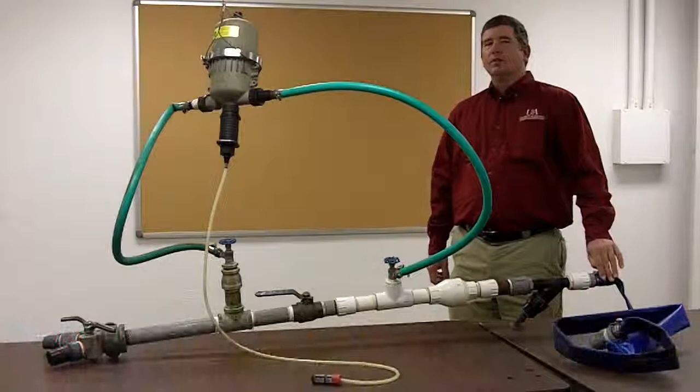Today we're going to talk a little bit more about irrigation and some parts that we typically use in drip irrigation here at the university and on small farms in the area. What I would like to show you today is we have a different type of fertigation loop that helps support a drip irrigation system on a local farm.

It's a little bit different, same principles involved in what we showed you earlier in our high tunnel strawberry plantings. But this one is a little bit different, and the main thing is that this system has a lot more flow capacity than what we have in the high tunnels. First thing I'd like to show you is this hose here is hooked up to your water source.

This system is pretty much designed on a 1.5 inch. The water flow that goes through this system is no more than 25 gallons per minute, which is considerably more than what we are using down in our high tunnels, where our maximum flow that we can have there based on our system is probably a little over 5 gallons a minute.

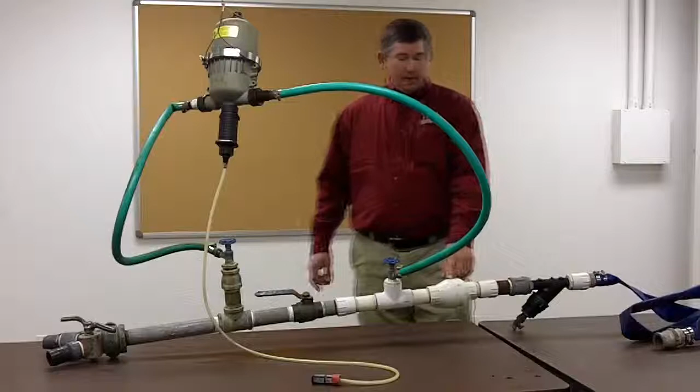The next part of this system is a filter. Then we have a backflow valve that keeps water from backflowing into the system. Then we start our fertigator loop here. As you can see, we have a valve here and the hose that goes to our fertigator unit. Then the output hose on the field side.

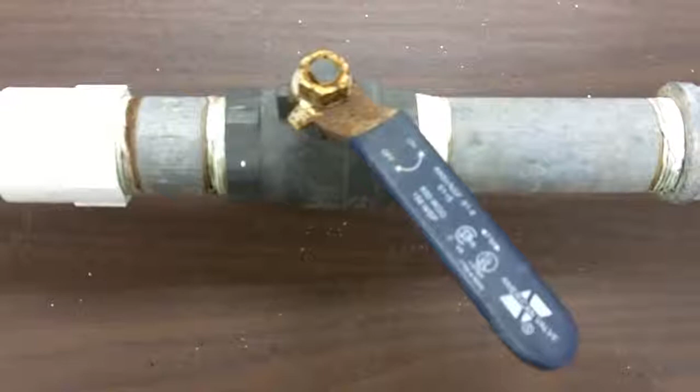Again, like we had shown you in the high tunnel, we have a bypass constriction valve on the main line to restrict flow, create back pressure to operate the fertigator. Then on our output side, here's a 2-valve manifold, so you can control where the water goes once it goes through the system.

As we had mentioned before, filtration is extremely important for drip irrigation systems, and the filter on this particular unit is different from the one in the high tunnel we showed you earlier. Though the cartridge looks the same, this filter here is actually a self-cleaning filter, and it has continuous flow going out of the filter all the time.

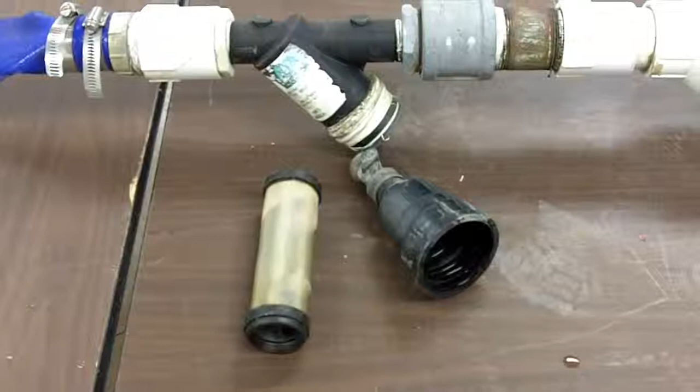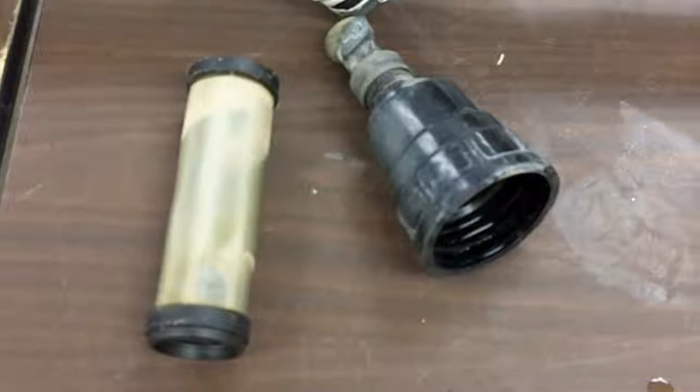Now this is set up on a well that has quite a bit of sand and some dirt in it, and the self-cleaning filter allows you to run your irrigation continuously and not have to stop and clean your filter out that often. Because remember, this unit here can run at 25 gallons a minute for days, weeks on end. However, what I've noticed about this particular one, usually once a day the filter does need to be taken out and cleaned, and then put in, then it's good to go for probably another day.

The disadvantage to this type of filter is that you'll probably lose a gallon, maybe 2 gallons per minute of water, depending on the amount of trash that's coming through and hitting your filter. If you have more trash coming through, you're going to have to increase the flow with this little valve on this particular filter.

Again, on any drip irrigation system, or any irrigation system in which you're using a fertilizer injector, there's some kind of chemical, whether it be fertilizer or pesticides, going through the irrigation water by some means. You have to have a backflow preventer valve. In this case, the well has a backflow preventer on it, but this loop right here outside the well has a backflow preventer.

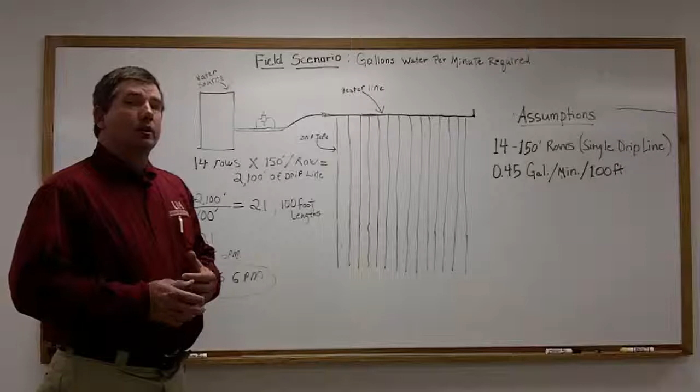We spoke earlier about one of the most important things with setting up a drip irrigation system or any irrigation system is to know how much water you're going to use in your field or fields, and to know how much water your source can provide. We've drawn up a little schematic and done some calculations here to help show you how to calculate the amount of water utilization per minute that a given field might use with drip irrigation.

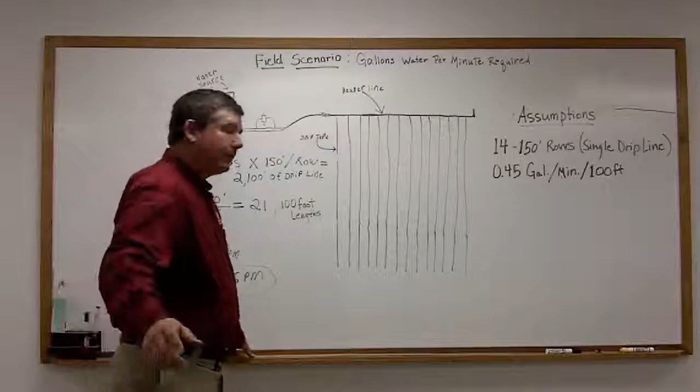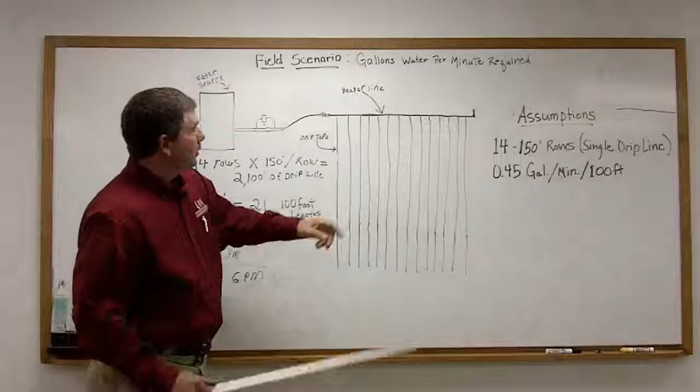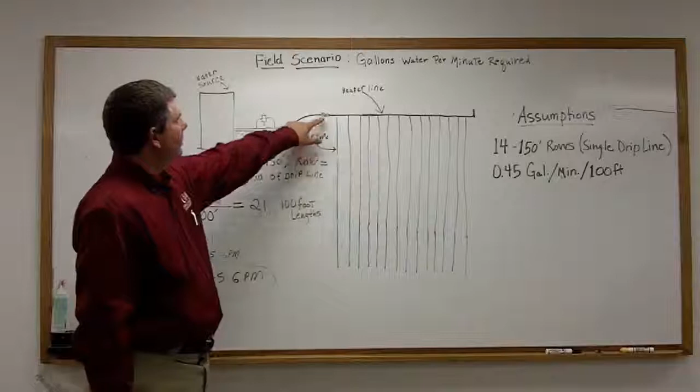First off, I'd like to show you that this is our field and our rows, and this represents drip lines. We've got 14 drip lines. This line here, however, is our header line that we talked about that our dripper lines are connected to. This is our water source, our fertigation loop, and I know you can't see it very well, but we've got a little valve and a pressure regulator right here.

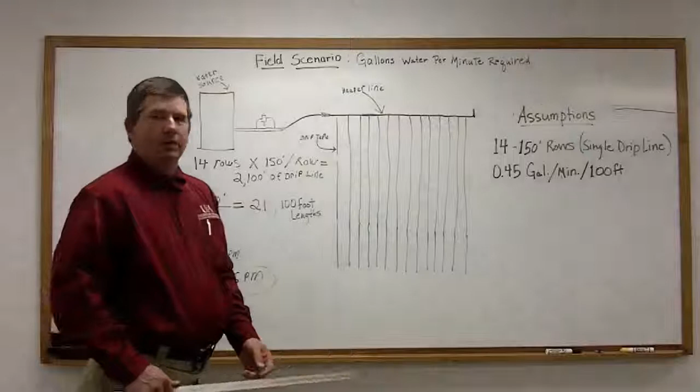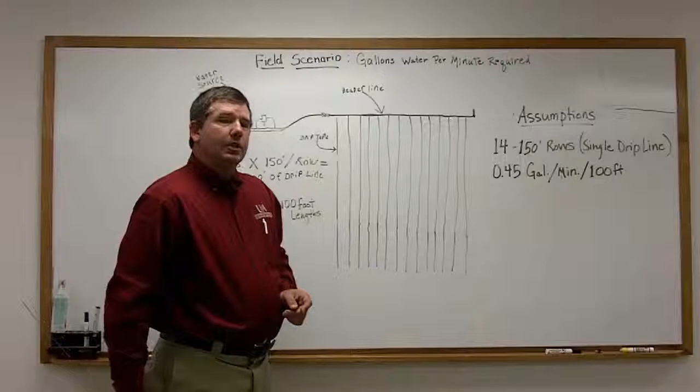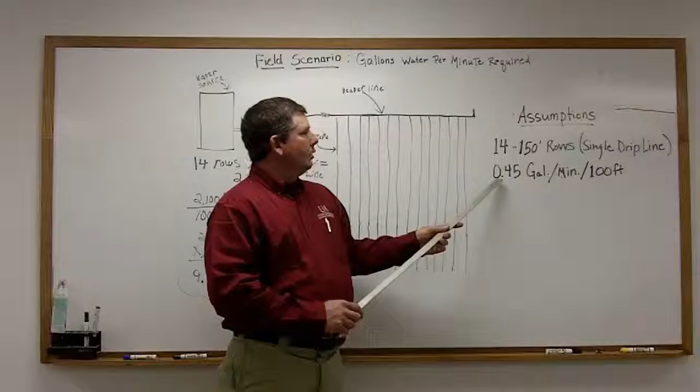Okay, we're going to make some assumptions about this small field. We're going to assume that we're growing strawberries and that they're double rowed, and that we're using a single drip line between each row. As mentioned, we have 14 rows, and our row length is 150 feet. The specifications on the drip irrigation line that we bought and installed say that for every 100 feet of this line, it will put out 0.45 gallons per minute. Now that's important. These are numbers we're going to use to figure out the water utilization of this field right here.

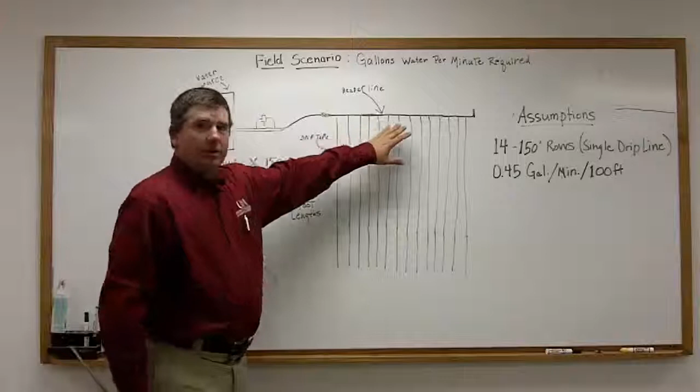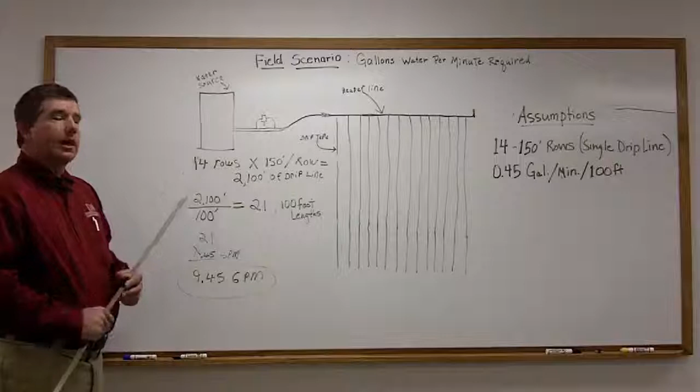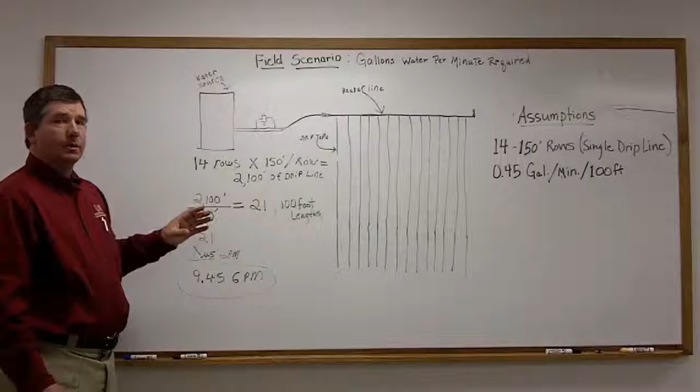The first thing we're going to do is, we know we've got 14 rows that are 150 feet long. We've got to calculate the total amount of drip line in the field. And once we do the math, it comes out to 2,100 feet. Now we want to convert that 2,100 feet; we want to know how many 100-foot lengths or segments are in that field. We simply divide 100 into 2,100, and we come up with 21 100-foot segments.

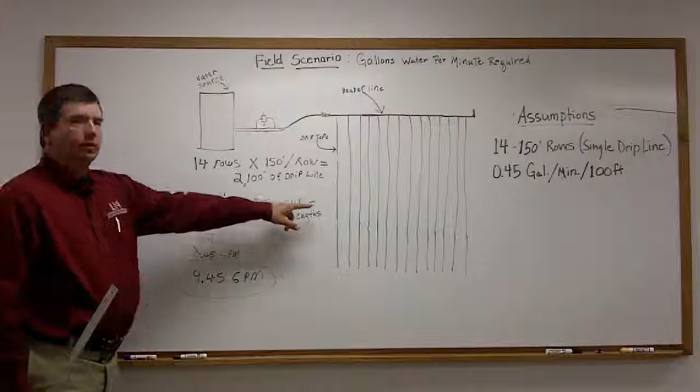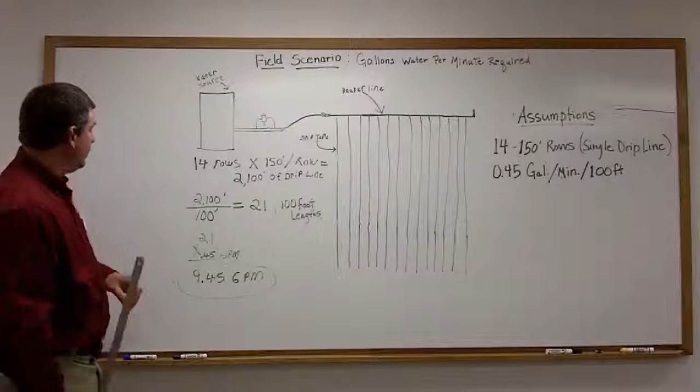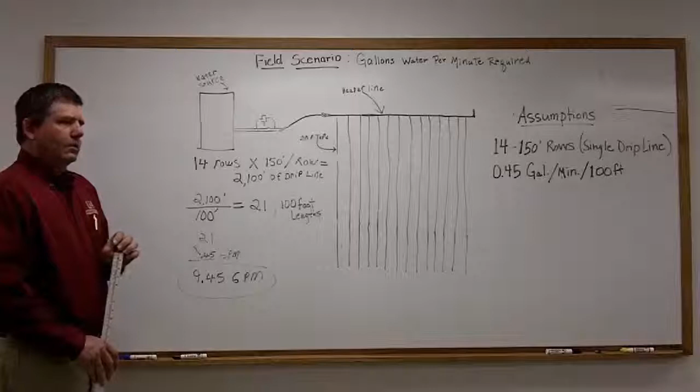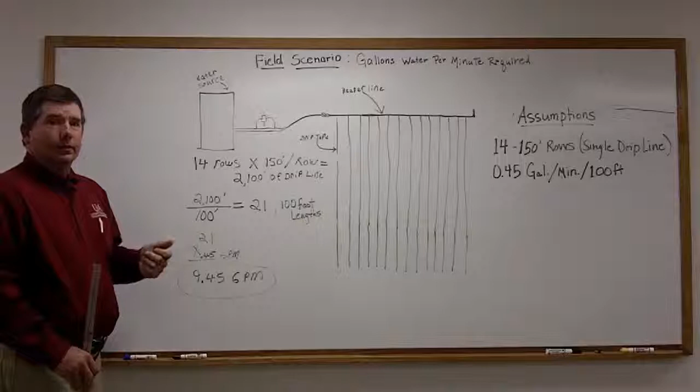Now, to figure out the total volume of utilization per minute of the drip line, we simply multiply 0.45 gallons per minute times 21, and the number we come up with is 9.45 gallons per minute water utilization by the field. And that's a theoretical number. There's a few things that might influence that. We may talk later on about leaks. There are some water efficiency factors that can be figured in, but theoretically that's what the drip lines in this particular field will put out, right at about 10 gallons per minute.